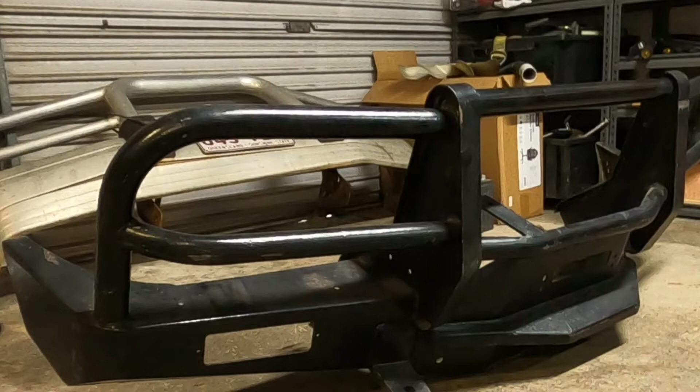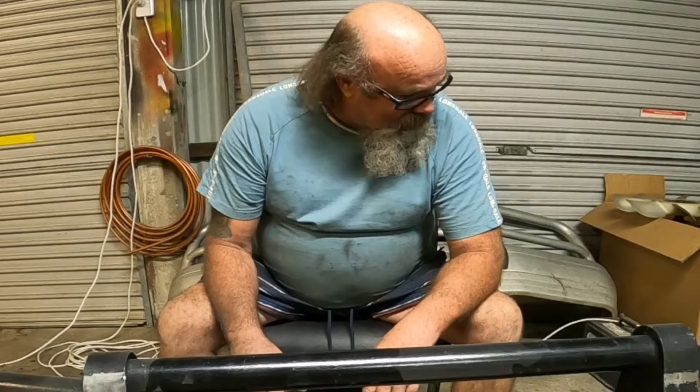So here we are, we've got a new bull bar, well, new to me. There's a lot wrong with this, but I did get it really cheap. If nothing, I paid less than what its scrap value is. Needs a lot of work though, so we'll have a look at it and I'll show you around this thing a little bit and we'll start doing some of the work.

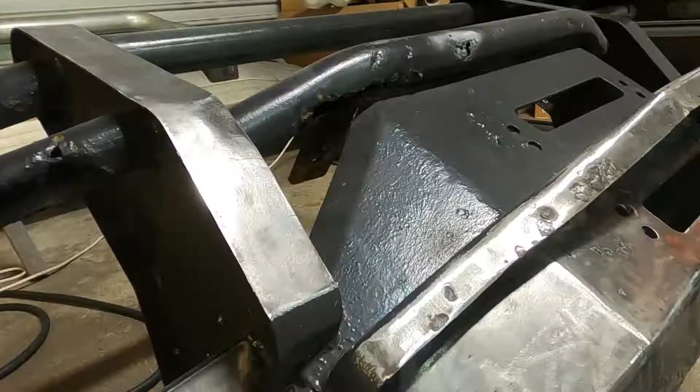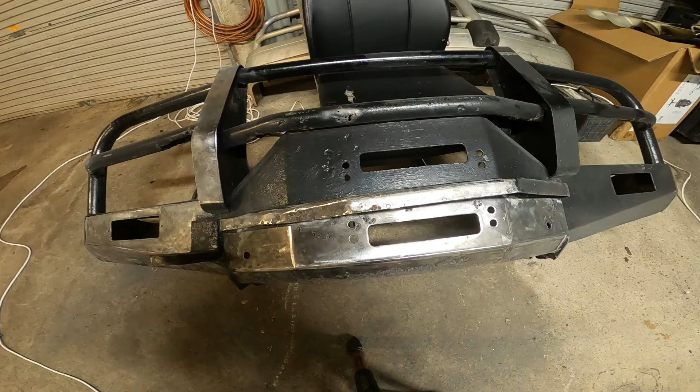It's actually set up to take 2 winches. I don't know if I'll keep that. What do I need 2 winch holes for? Absolutely nothing. I could possibly use some of that steel as replacement steel for other parts of this bull bar. So the more I look at this thing, the more I'm thinking this whole section needs to go and be totally redesigned. I reckon I can definitely do something better than that. Plus, for modern winches, this setup is no good.

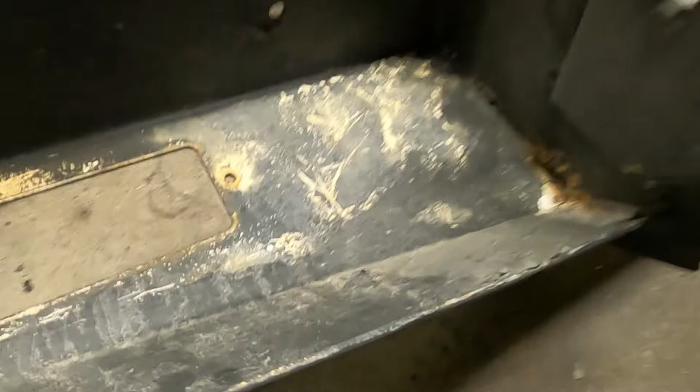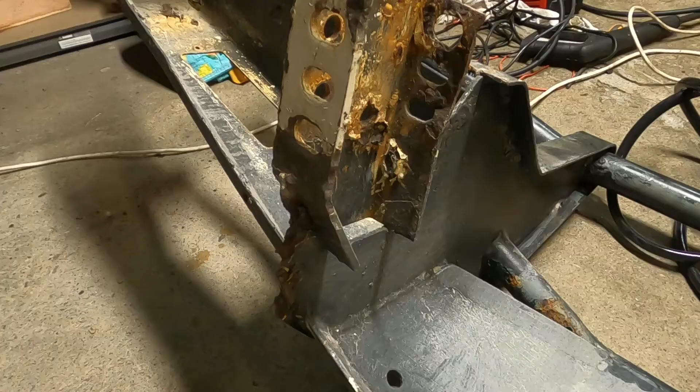It's all offset and it's just bloody, yeah, it's ugly. I hate it, I think it looks awful. Just the design of those mounting points doesn't make me very happy. I don't think, quite likely I'll just rip them out, to be honest. I want to see if I can get maybe some C-channel to replace that. I'll work out a better way of welding this in rather than just being welded along these 2 points here. For any sort of serious recovery, I don't think they're going to stand up, to be honest. Doesn't look the part to me.

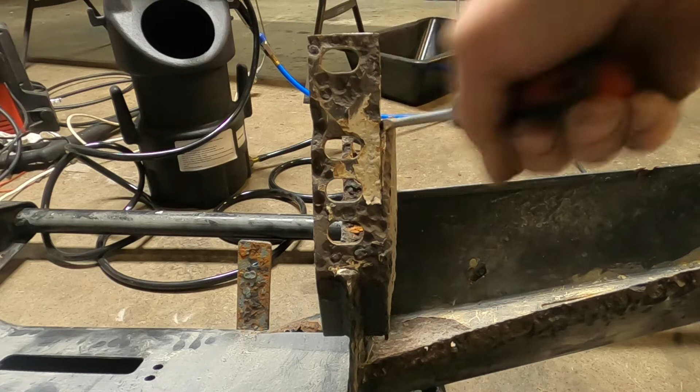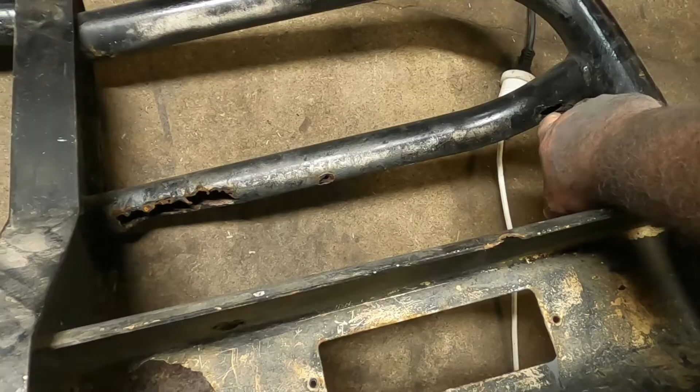This one's actually split on the welds, so yeah, not much chop there. Another point in here, there's a towing eye welded onto that, and right around where that's welded, it's just corroded and turned to shit really. There's a hole here, another hole here, and a massive hole right there. It's moving over. In the centre, it's pretty much the same.

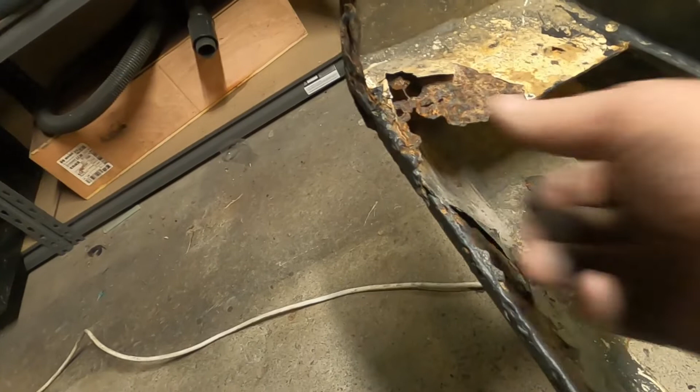So that whole centre tube, lower tube, is going to be replaced. I might just replace this one, it's not quite so bad here, does have a bit of rust just there. That one's not as bad. But then we look at the braces on the inside, they're pretty much rusted away, so that's all going to have to be cut out and replaced. This bottom part of the bar is going to have to be replaced as well. That's cactus.

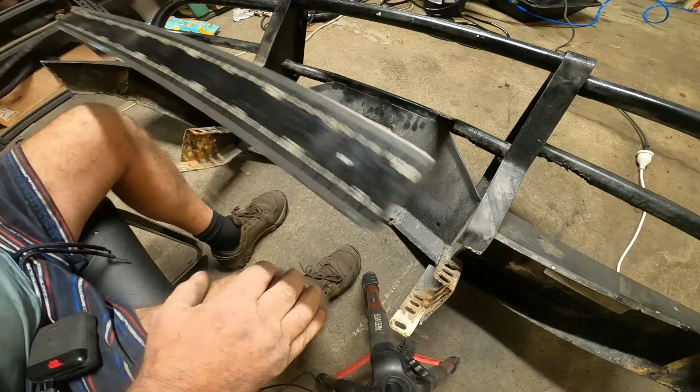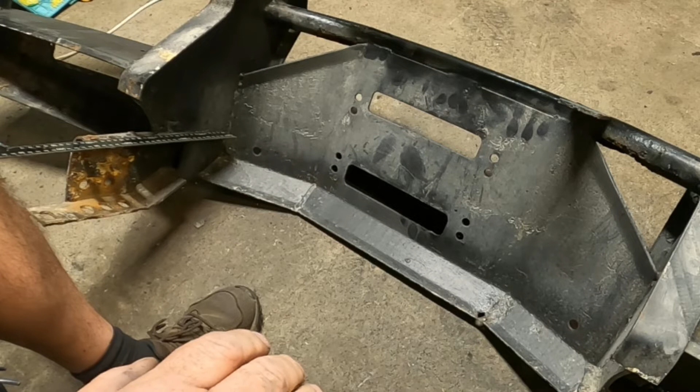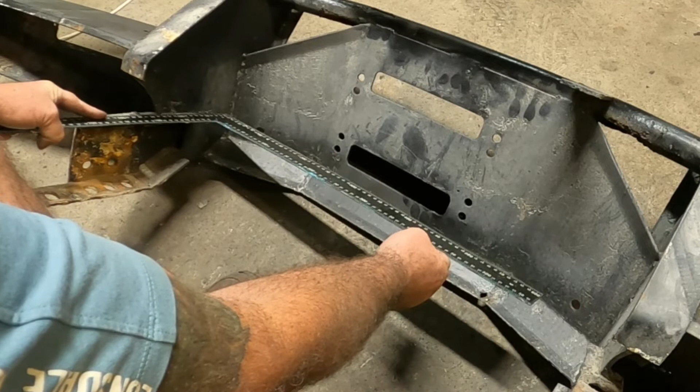So what I'm thinking is cut these mounts off completely, they're a piece of shit. I'll make up some mounts that will mount directly to the chassis, make them longer so that they come right down on this piece here. But I don't want to weld the bar, I want to bolt the bar itself on. So if I place a piece of, say, 5 or 6 mil plate, which is going to be plenty strong, in there, that will come out and actually bolt to the chassis mounts and also bolt to the bar. So the bar is actually separate from the mounting itself.

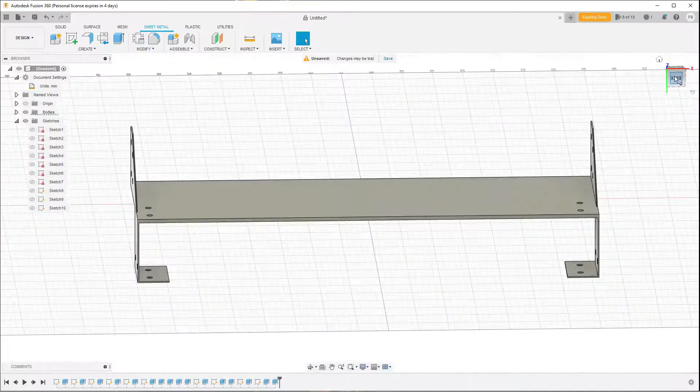The idea I've got is that when the winch is used, all the weight, all the stress on the winch, goes directly from this mount through what will be the replacement bull bar mounts to the chassis, rather than bolting directly to the front of the bar and all of that. Does that make any sense? I hope it does. But look, if you've got any ideas about this, drop us a comment, because I might be pissing in the wind here, but I think I'm really trying to go in the right direction here. I might as well just show you a bit of a CAD drawing and what I'm thinking might make things a little bit clearer.

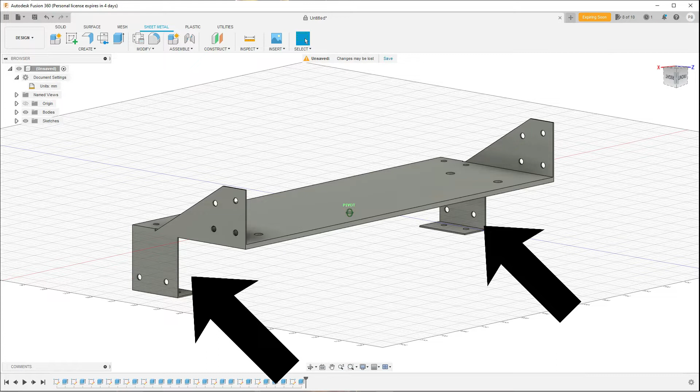So try and picture the 2 vertical sides here bolting onto the bar, with these 2 bottom brackets bolting onto the chassis rail. Hopefully that'll do the job.

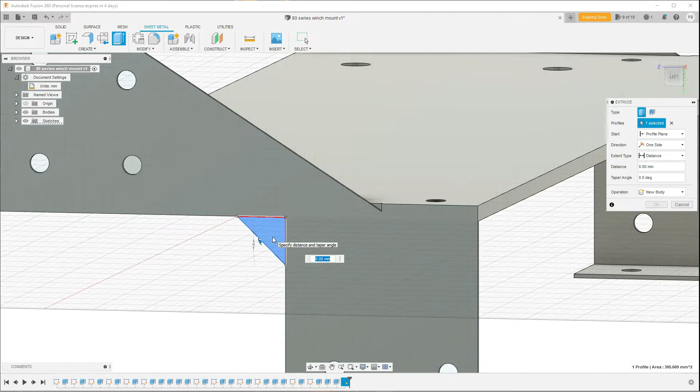So I reckon that's going to turn out to be a much better solution than this piece of junk. I thought I might just chuck a couple of gussets in there too, on what looks like it's going to be an obvious weak spot. Ta-da!